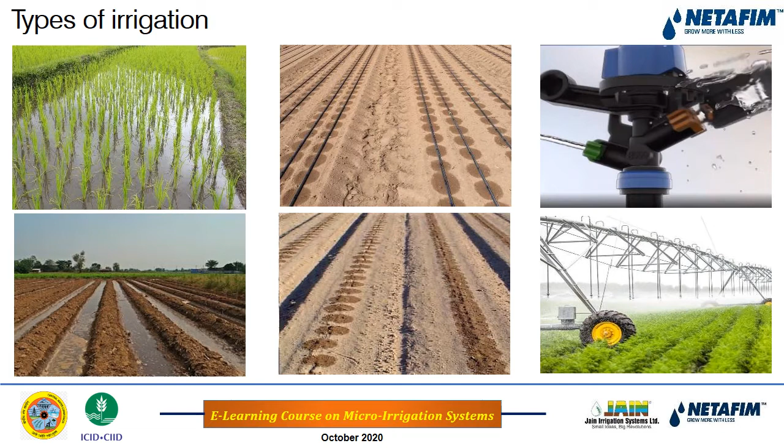And drip irrigation, that is the most efficient irrigation system, wherein the water use efficiency is above 90%. It can be in the range of 90 to 95%, because we do not have any conveyance losses. In drip irrigation, we will be having entire closed conduit network from the water source up to the field, and inside the field also we are irrigating just the root zone of the crop and not the entire soil surface. So that is the beauty of drip irrigation, wherein we can have most efficient water use as compared to the other irrigation methods.

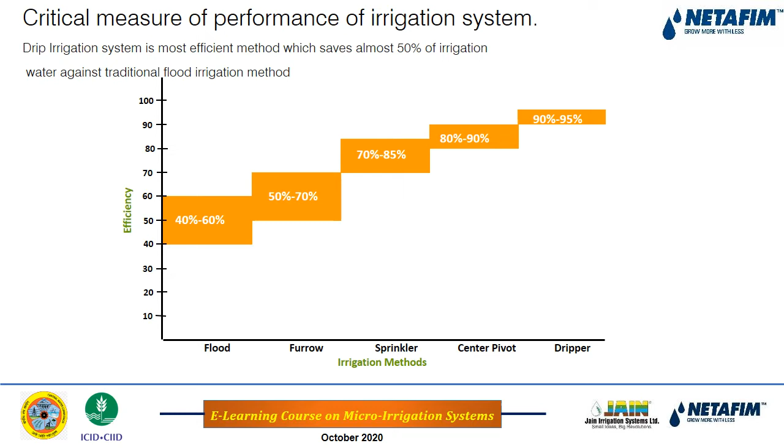Conventional canal irrigation systems, that is broadly used in India and many countries. Water is diverted from the source, from the reservoir or dam, either by gravity or it is pumped with a suitable arrangement of intake canal and pump house. Then water is delivered into the main canal. At the head reach of the canals, everything is okay. People are cultivating water intensive crops like paddy also.

But as the canal progresses towards the end, because of inadequate maintenance and breakages in the canals, the conveyance losses are much more. Most of the water goes as waste because of deep percolation and runoff. So water is not reaching the canal tail ends. So there is inequitable distribution of water. People at the canal head reaches are cultivating water intensive crops like paddy or sugarcane, and water is not reaching till the canal ends. So there is a huge difference between the irrigation potential created and actually utilized.

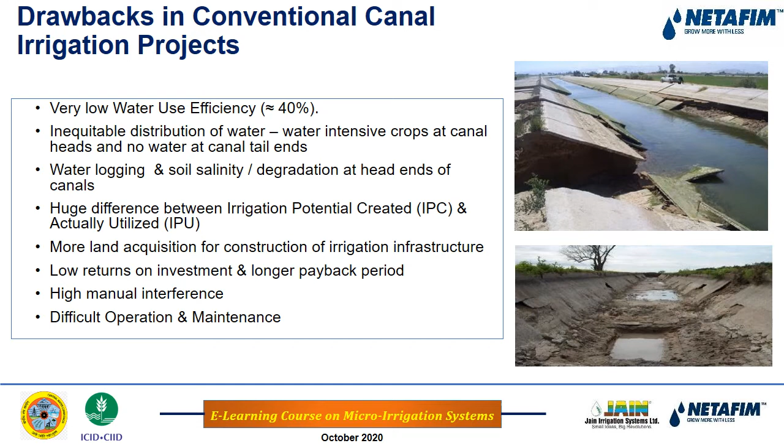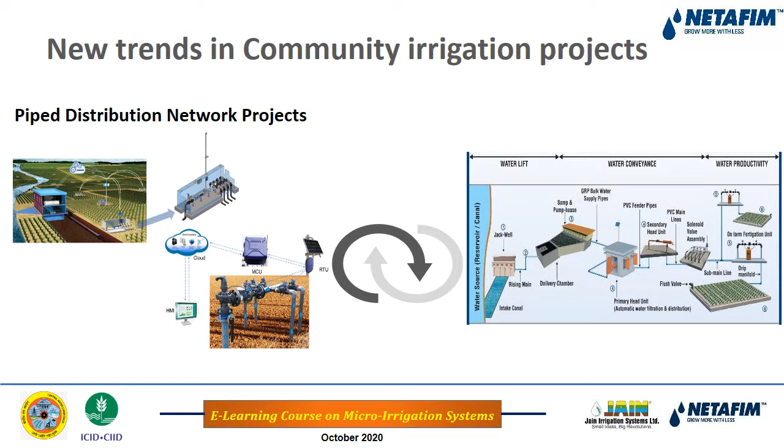New trends in community irrigation projects. Apart from the conventional canal irrigation, nowadays in India at least, different models are coming up, that is the pipe distribution network and the community micro irrigation. These are the new trends in community irrigation projects. We'll see them one by one.

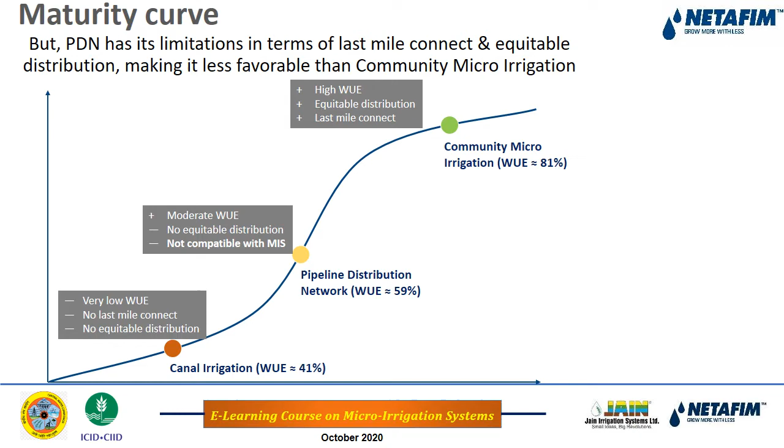This is the maturity curve. In the conventional canal irrigation method, the water use efficiency is very less, around 40%. The pipe distribution network is in between the community micro irrigation and the conventional canal irrigation. Only the conveyance efficiency is increased a little, so the overall water use efficiency in the pipe distribution network can be around 60%. But the most effective community irrigation system can be community micro irrigation, wherein the water is conveyed through closed conduit networks, and for infield water application, the drip irrigation system can be adopted. In this system, the overall water use efficiency can be above 80%.

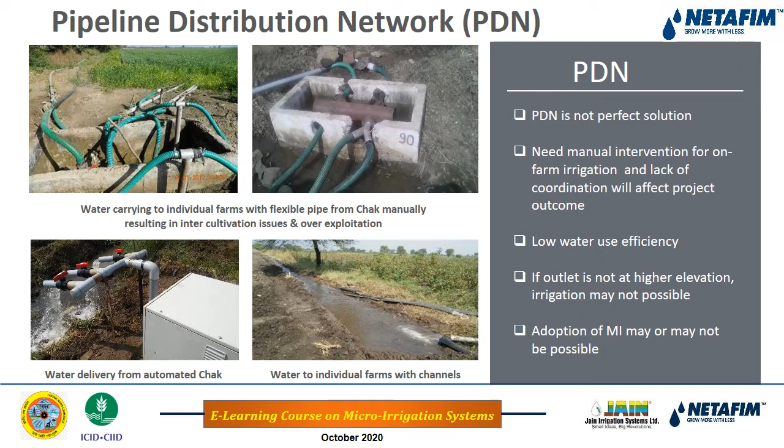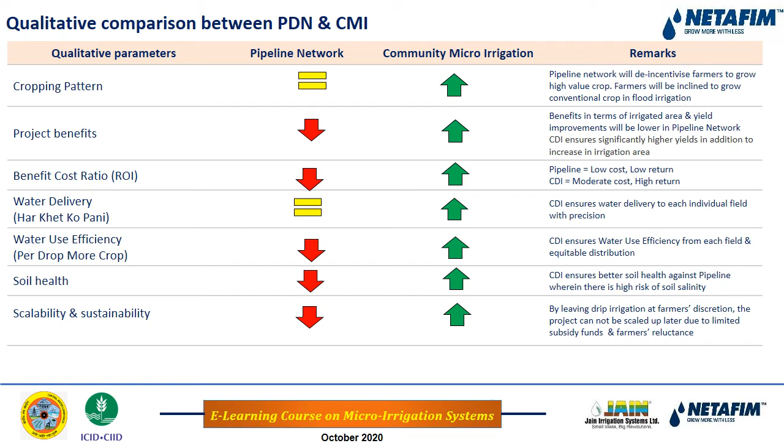Community micro irrigation is a system wherein the government develops the irrigation infrastructure to benefit a large number of small farmers, or farmers themselves come together to form a group, develop the common infrastructure, and cultivate crops for better returns. In most places, the perennial water source is far away from the individual farms, so it is not possible for individual farms to develop lift infrastructure on their own.

So if such small farmers come together and form a cooperative water user association or society, they can develop common lift infrastructure from the water source at a long distance. It can be a reservoir or river, and if they develop such common infrastructure, they will get assured irrigation water throughout the year, and they can cultivate perennial crops and get good returns on their investment.

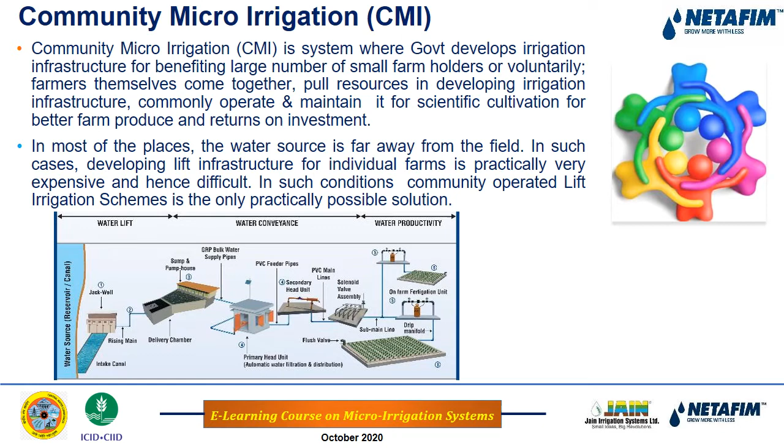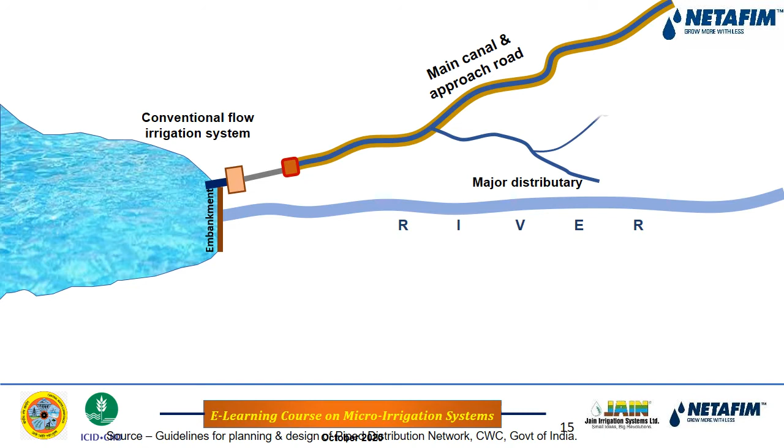In conventional irrigation, there is a river, then embankment, water is stored on the dam, and then the common practice is to have the lifting infrastructure. Then water is lifted from the source and delivered at the highest point. From there, the main canal runs. Then there will be major distributary, minor distributary, and for the infield water application, water goes by flood irrigation. So the overall water use efficiency in such projects is very less. It can be around 40 to 42%.

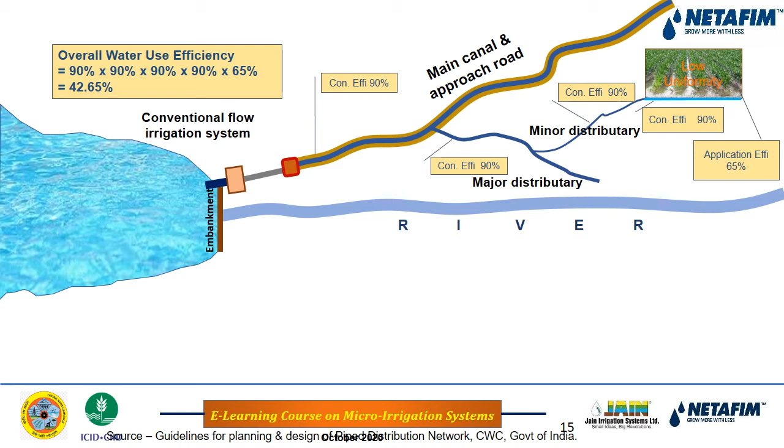Also, along the main canal there should be road for the approach. So huge land acquisition is required in such projects. But in case of integrated lift and drip irrigation projects, water is lifted from the source and conveyed through the closed conduit pipe network, underground pipe network. So the land acquisition is not required. And also for the infield water application, advanced irrigation systems like drip and sprinkler can be adopted.

So the overall water use efficiency in integrated lift and drip irrigation projects can be above 80%. So with the same amount of water that is allowed for the conventional canal and flow irrigation, we can irrigate almost double the area.

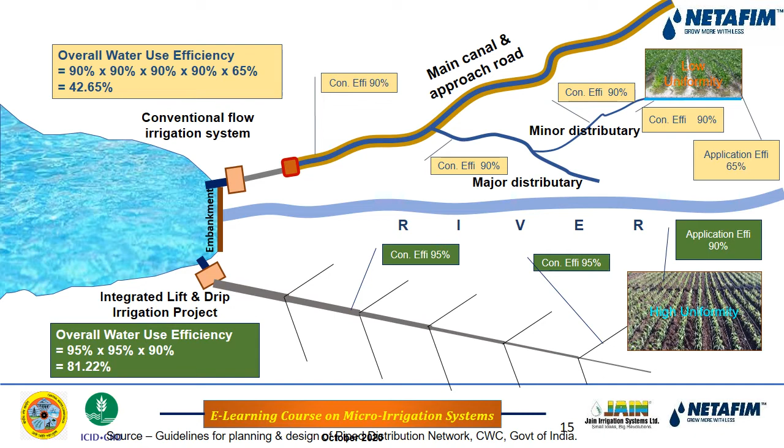Advantages of community micro irrigation: with the same amount of water we can irrigate double area, high water and fertilizer use efficiency, much better farm quality and yield, saving in land acquisition costs, easy operation and maintenance, automation and precise irrigation is possible, conveyance losses are very less, and equitable distribution of water. These are some of the major advantages of integrated lift and drip irrigation projects.

So phases in community micro irrigation projects: initiation and conceptual design, planning and detailed design, execution, and operation and maintenance. Almost in all the community irrigation projects implemented or being implemented in India, these projects are to develop the irrigation infrastructure, the engineering infrastructure, as well as the social engineering aspects are also part of the project.

That is the training and capacity building of the project's associates, including the government officials, farmers, then the market linkages, facilitation for the marketing of the farm produce, then formation of water user association, and also the operation and maintenance after the successful commissioning of the project. So all these projects are being implemented with these.

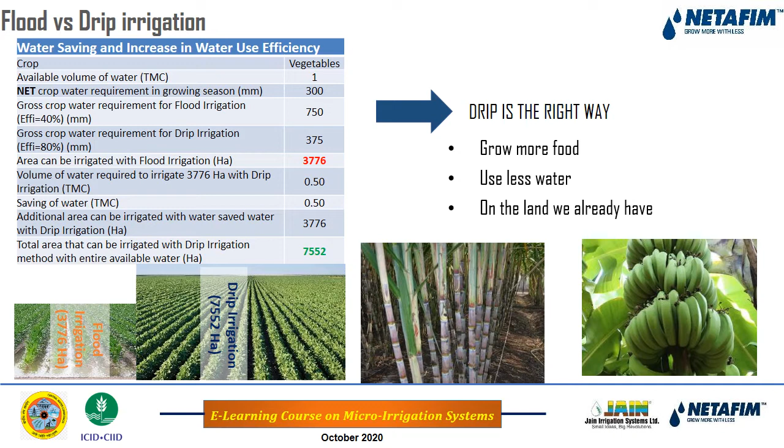So the proposed solution, as PDN and conventional flood irrigation is not that effective, is community micro irrigation, which integrates these two components, Har Khet Ko Pani and Per Drop More Crop. That is, water is conveyed from the source and made available for each and every field. And for the infield water application, drip or sprinkler irrigation can be adopted. So the water use efficiency in these projects can be very high. Also, we can ensure good returns to the farmers. Also, the farm productivity will be very good because of adoption of the advanced micro irrigation systems.

So a few examples of community micro irrigation projects in India. Gotkindi project, probably the first of its kind community micro irrigation project, community drip irrigation project. We implemented this project in 2010. Actually, this Gotkindi lift irrigation scheme was established in the 1980s for 608 acres area, but during 2008-9, because of the load shedding or the power cuts, the entire area was not being irrigated.

Nowadays the electricity available for irrigation is generally 10 to 12 hours only. So as the system was designed for 24 hours irrigation, but now the electricity is available only for 50% of the time, the entire area was not being irrigated. So that was the trigger. So when we approached this cooperative society and asked them to adopt drip irrigation, they found it useful, and the entire scheme was converted to drip irrigation for the infield water application, and now every field is getting water daily.

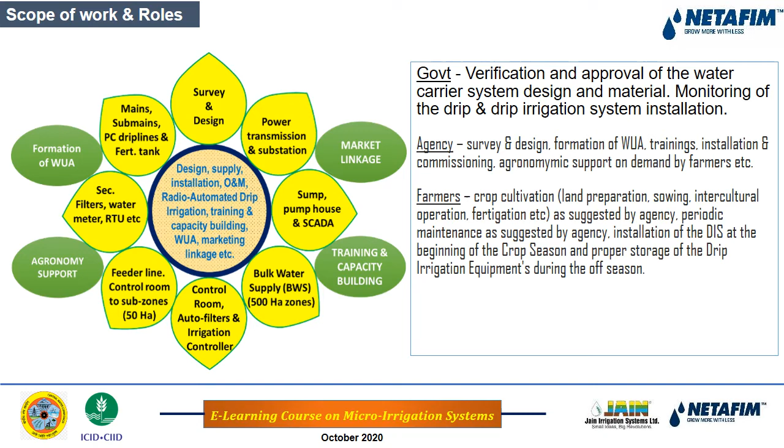Initially the agency had to survey and design the system and submit it for approvals. So the approval and monitoring of these construction activities is the responsibility of government. Survey, design, formation of water user associations, trainings, installation and commissioning, operation and maintenance, these are the activities the project execution agency has to do. And cultivation practices like intercultural operations, buying the seeds, fertilizers, pesticides, laying the drip lines, rewinding, storing them in good condition, and regular operation and maintenance, these are the activities farmers are supposed to do. So this is the broad scope matrix for these community irrigation projects.

Apart from the Ramthal project, there are other projects under execution. The Singatalur lift and drip irrigation project. The major crops in the project area are jowar, maize, vegetables, floriculture, groundnut, sunflower, soybean, wheat, gram. The cropping intensity for the Singatalur project is 100% during Kharif and 20% area during Rabi, so the overall cropping intensity is 120%. We are supposed to irrigate 3.2 millimeters during the Kharif season and 6.2 millimeters during the Rabi season. The maximum operating hours for the project is 24 hours. The pipe distribution network is a combination of MS, HDPE and PVC pipes. The average drip line spacing is 4 feet, that is 1.22 meters, and this project is under execution.

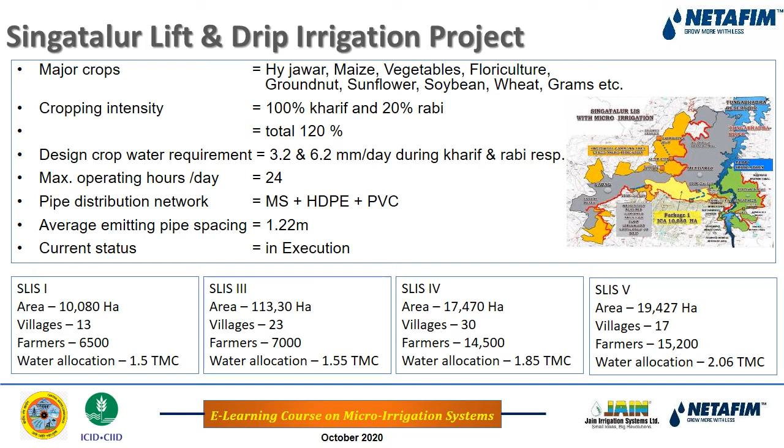Singatalur 4 is to irrigate 17,470 hectares, benefiting 30 villages and 14,500 farmers. The water allocation is 1.85 TMC. And Singatalur 5 area is 19,427 hectares, benefiting 17 villages and 15,200 farmers. The water allocated for this project is 2.06 TMC.

In this project, we are supposed to irrigate 100% area during the Kharif season. The crop water requirement is 2.1 millimeters per day during the Kharif season. The system is designed for 24 hours operation. The pipe distribution includes a combination of MS, HDPE and PVC pipes. The average drip line spacing or the emitting pipe spacing in this project is 4 feet. This project is also under execution.

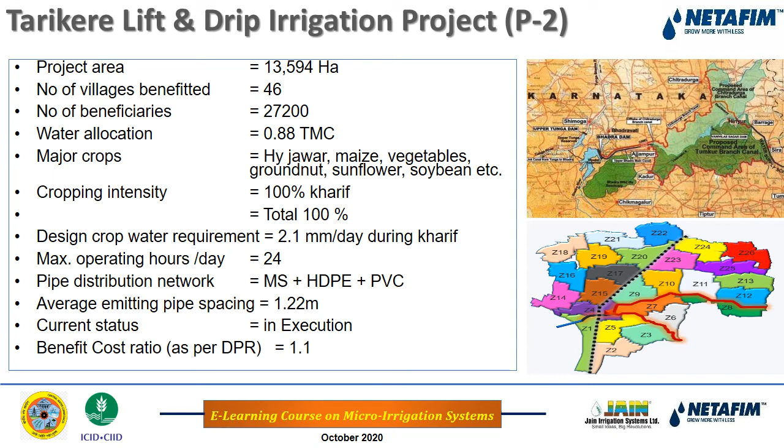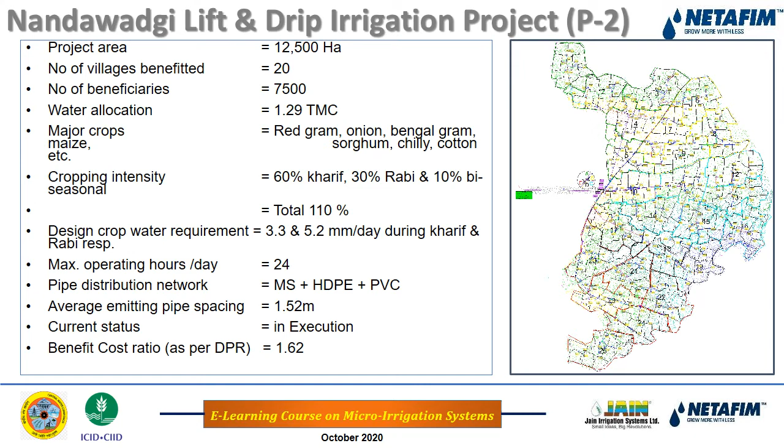Factors affecting project cost. The project cost is never a constant, and we cannot generalize based on one project's cost. The project cost depends on case to case, and these are the factors on which the project cost depends. That is the distance of water source from the project area, then cropping pattern, and the climate of this particular area, which affects the crop water requirement and the system cost. Then project area geography, the topography of the land and the soil composition, whether it is soft soil, murum or hard rock, because the earthwork or trench works are affected by the type of soil.

Then what is the crop geometry and emitting system specifications? What are the common crops in the project area, and accordingly the irrigation system will be suggested. So the emitter specifications affect the system cost. Then material of the pipe distribution network, whether we are going for MS, HDPE, ductile iron or PVC networks, affects the total project cost. And then the power availability and system operating hours per day. The system cost is never the same if we have 10 hours of system operation and 20 hours of system operation. So more the operating hours, more cost effective the design, and lesser the operating hours, the costlier the system. So these are the major factors which affect cost of the community micro irrigation system.